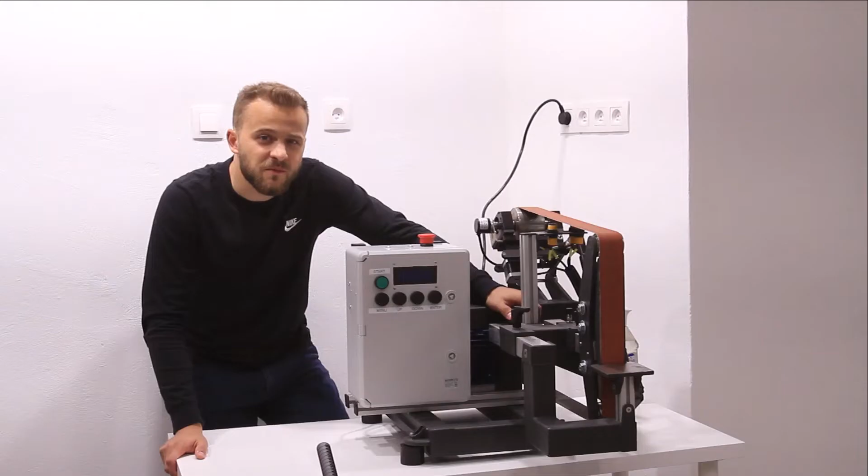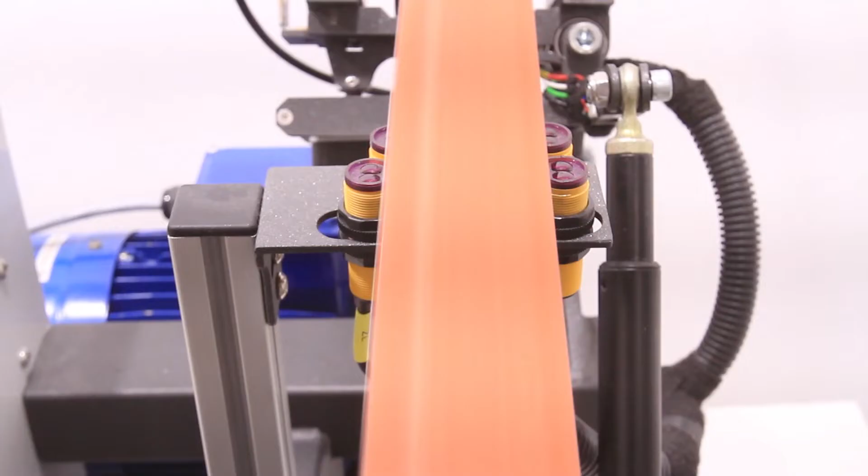In this video I'm going to show you how I constructed this belt grinder. Let's start with a 3D model created by me earlier. It allowed me to predict the alignment of components and their mutual interaction when in use.

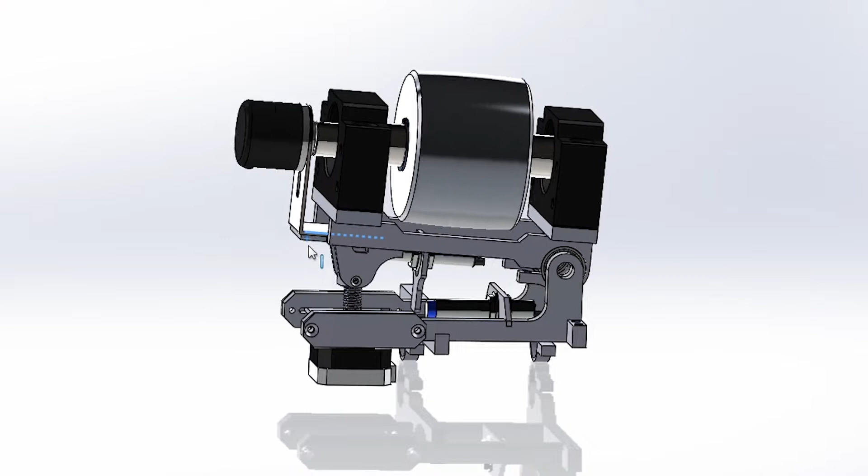What distinguishes my machine is the application of Arduino microcontroller to the following things: the interaction of the operator with the grinder, setting the working parameters and reading the actual parameters, ensuring that the actual speed is maintained, tilting the guide wheel to make sure that the belt is in the right position, and ensuring the proper tension of the belt. Let's now see how the whole thing was constructed.

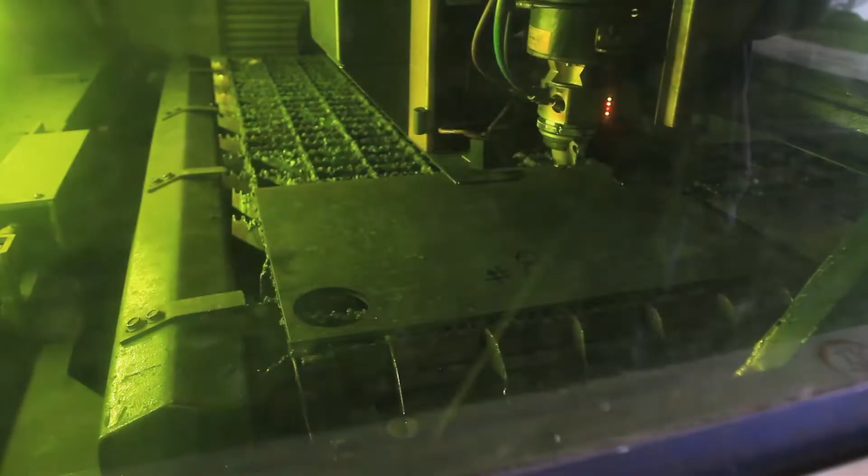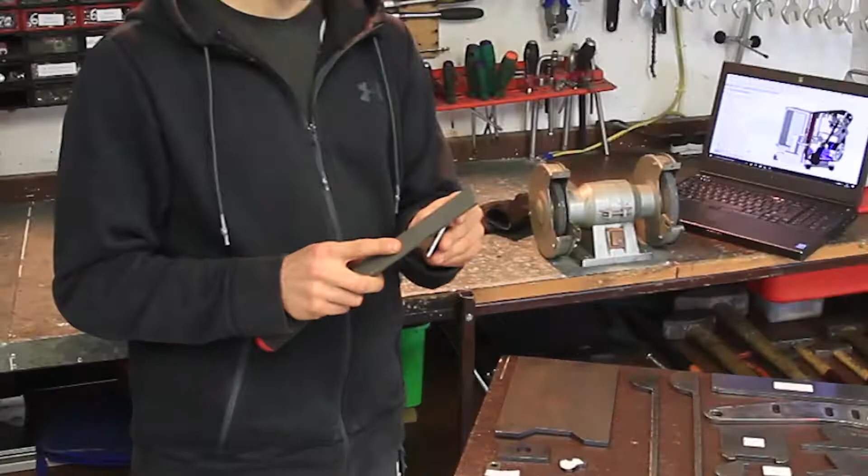Welcome in the garage. Let's start the assembly process. All of the parts I've created in 3D modeling software, I've ordered laser cut. I have cleaned them with a wire brush on a drill press, and then I've touched all of the edges with a file to make them smooth.

Now I have to take care of the third dimension, because as you can imagine, laser cuts only in 2 dimensions, and the third dimension is the thickness of the steel. So if I want to make some holes in this third dimension, I have to do them myself now.

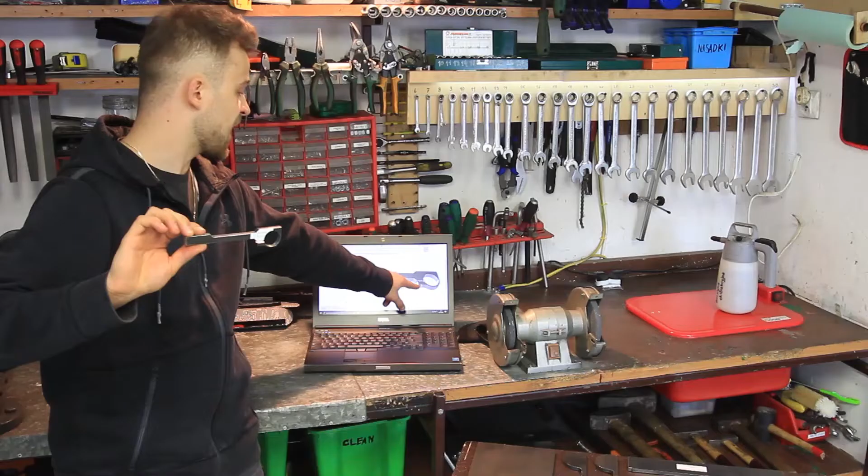Let me set an example. This is the bearing holder, and it should have a screw hole which is tapped and countersunk right down there in its third dimension. So let's move to the drill press and drill that hole. The process of drilling a hole might seem simple, but a few vital steps have to be taken.

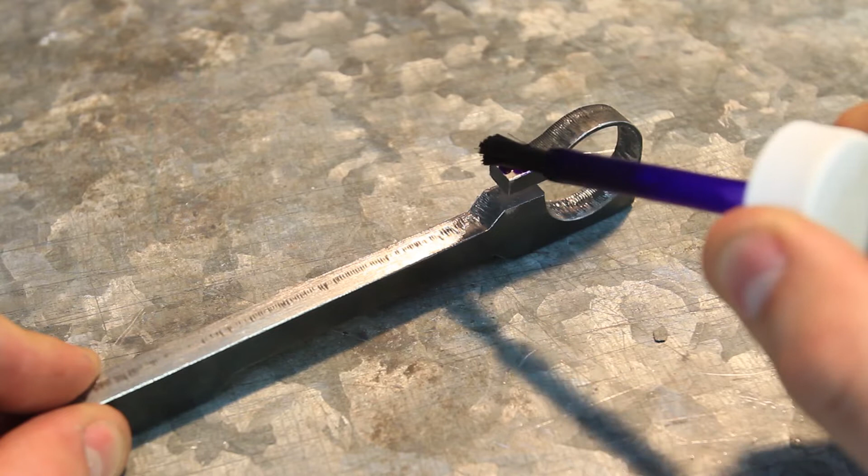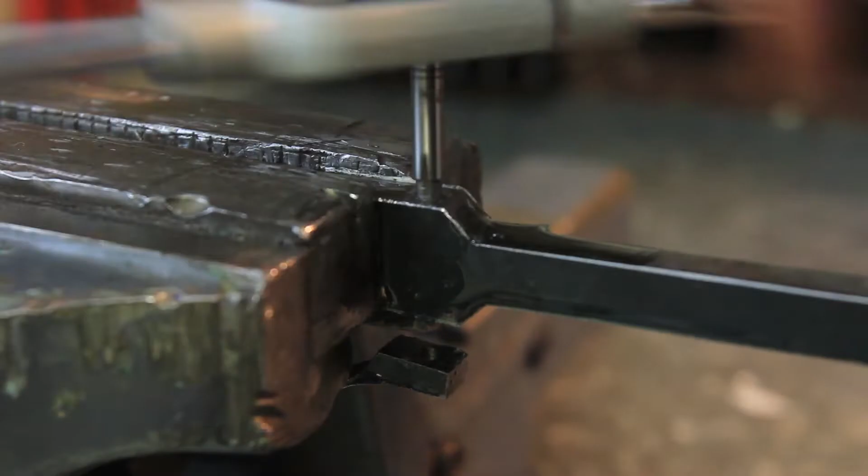First things first, the location of the hole has to be marked by scribing a layer of steel blue tracing fluid. Then the marked location has to be center punched. Drilling and making a countersink for a screw head are almost the last thing to do. After making the inner thread by a tap, it's time for a quality check with the appropriate screw.

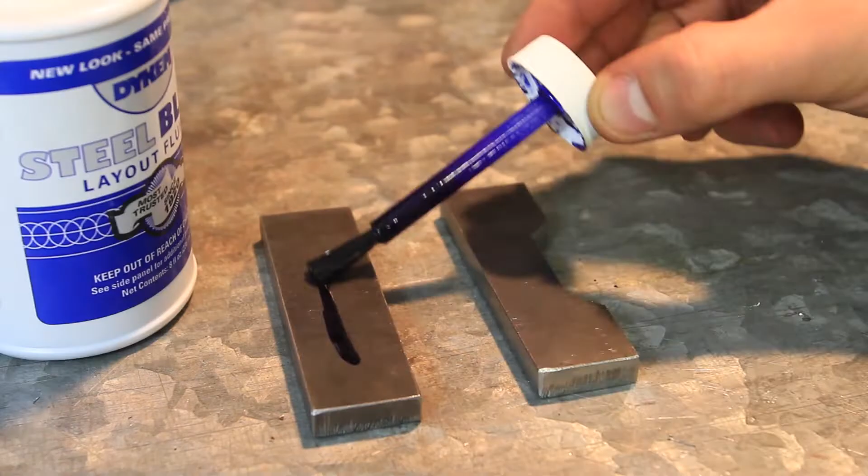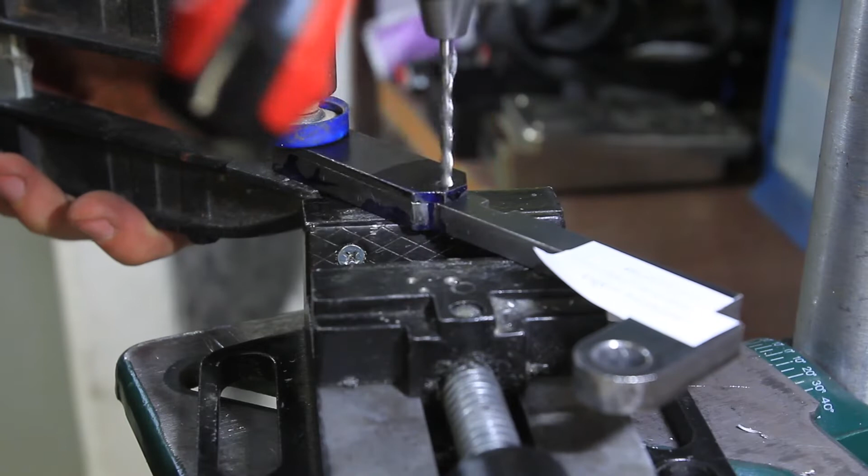Not everyone knows, but by using a combination of Ctrl+C, Ctrl+V on your keyboard, you can make multiple copies of your operation. The parts I have just made are components of an important subassembly. In common belt grinders available on the market, there is always a small adjustment knob. Turning that knob leads to tilting of one of the wheels. That wheel, which is out of the alignment, leads the belt to its side, compensating for belt or machine imperfections.

In my grinder, the operator will not have to adjust the belt position. Instead of forcing him to do this work, the grinder will adjust itself automatically by rotating the stepper motor, which is part of the tilting tensioning mechanism which you see me making right now.

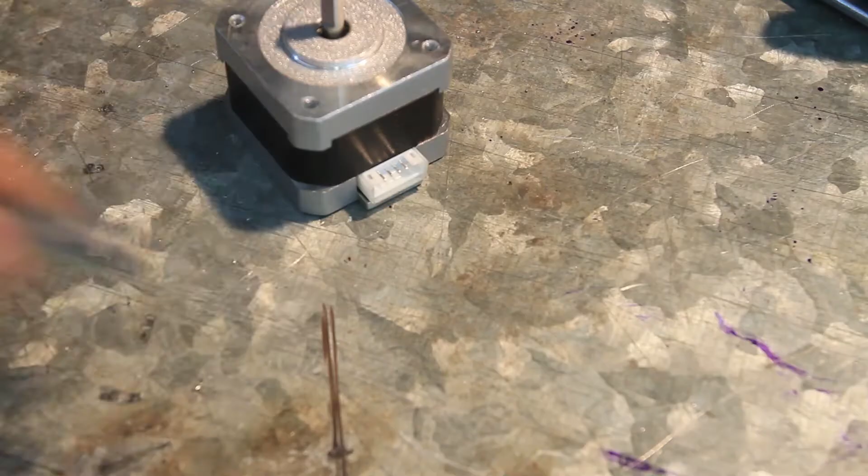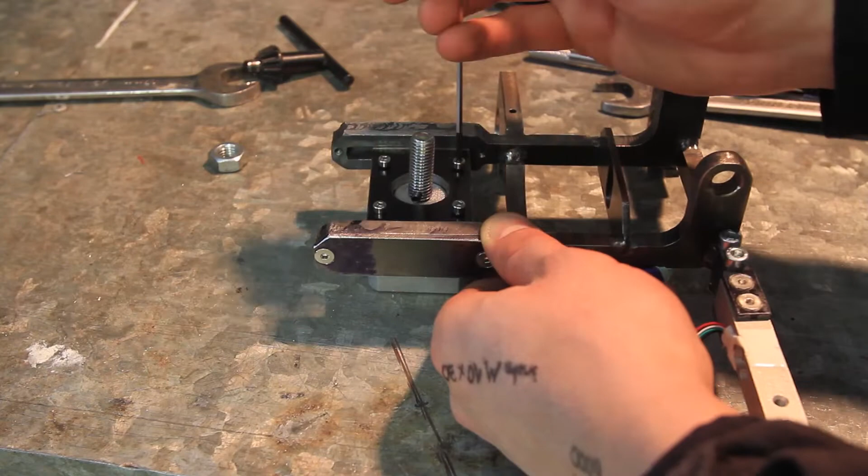After making this, I mounted the hollow M10 bolt on a stepper motor shaft and secured the motor to the sliding bracket with 4 small screws. I also modified an M10 nut by drilling it crosswise. By 2 screws with outer diameter smaller than the holes in the nut, I created a sort of a hinge, which leaves the nut with 1 degree of freedom, allowing it only to rotate around the screws.

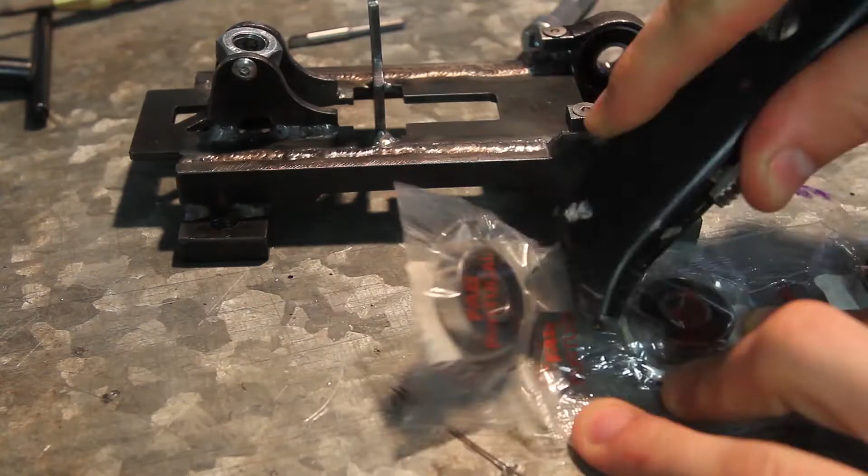Then, the bearings were inserted and set in place by the clamps tightened on them. I am very pleased because I have finished making this assembly. Of course, I have to give it a paint job later on, but mechanically it's ready. This is responsible for compensating any imperfections in the whole grinder build. It will do that by tilting the guide pulley left or right to move the belt to the center.

Now I have to move on to the next part of the build, which is making the frame. And I will do that frame using 50mm by 60mm box sections, which I have right down there.

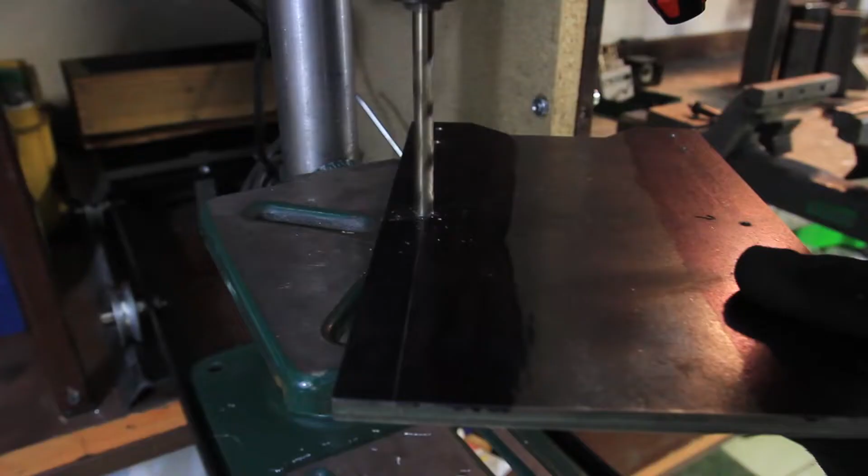Okay, so I've prepared all the material, I have cut all the necessary parts to make a frame, and I have painted the faces of the steel with the steel blue to mark the places where to drill out the holes. When these holes are finished, I will move on to the welding process and weld the frame.

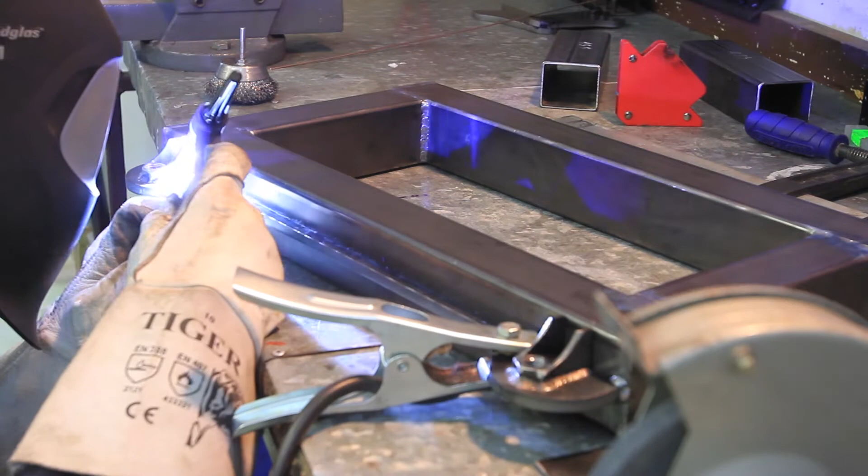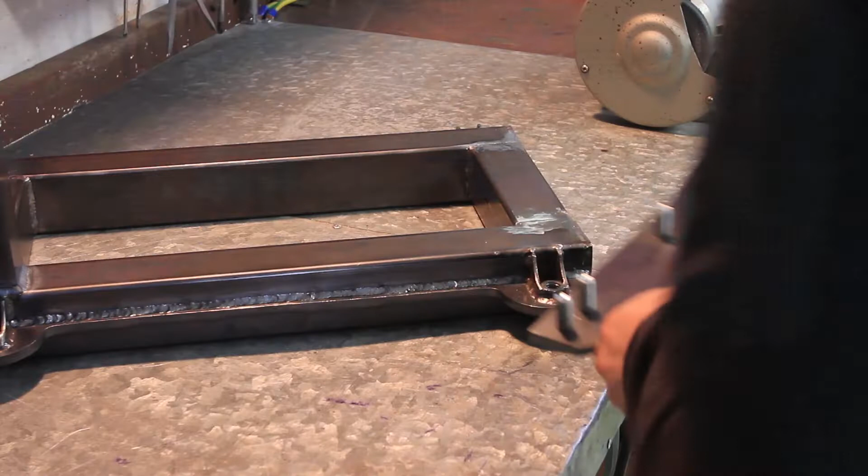After having the last part of the frame welded together, I sent all of the ready components to have them powder coated. Now you can see me manufacturing the shafts for 2 of the belt wheels. I used a piece of chrome coated rod with outer diameter of 20 mm, which is available on the market. Using a handsaw I cut it to length and then I drilled it through and tapped the hole.

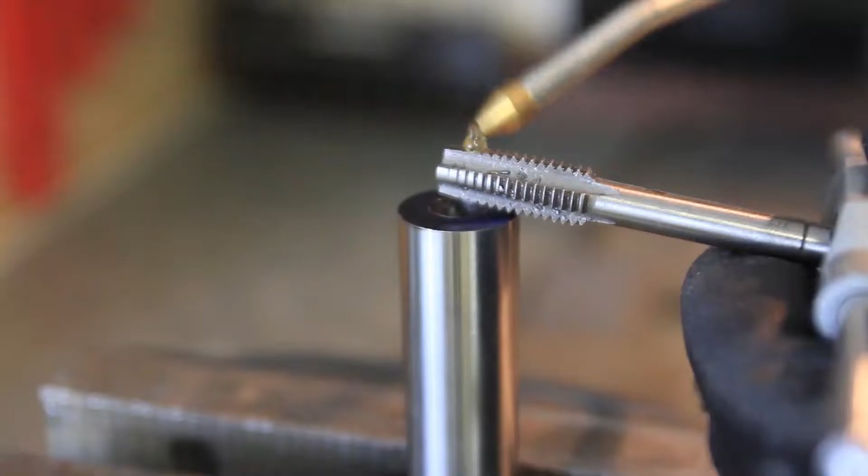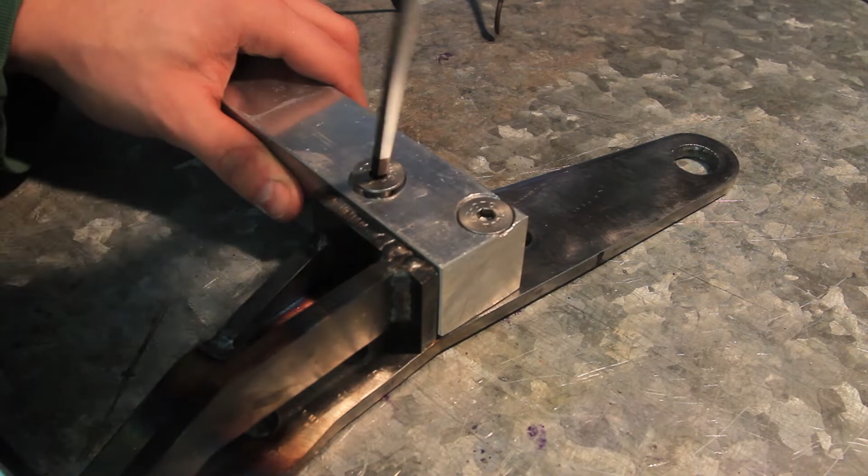Off camera I welded the bracket, then I connected it to the aluminum bar with 2 M10 screws. Freshly threaded rods fit into holes in the bracket where they're permanently secured with a circular weld. I have finished making this pulley holder and I really wish it would be straight, but it will show when everything is finished.

The rest of the laser cut parts still need my attention, but I have received a painted frame. I have it powder coated and I'm really happy with the result. Now I'm going to move on to the next step, which is assembly of the frame and the ready parts and some bought parts, like for example the electric motor.

Then I'm going to use the ready parts as the reference point when welding these parts right there. This will make things a little bit easier because the metal tends to shrink when it's welded and you really can't predict the exact dimensions after welding. So when I use the frame as a reference point, I really wish that everything will fit together nicely.

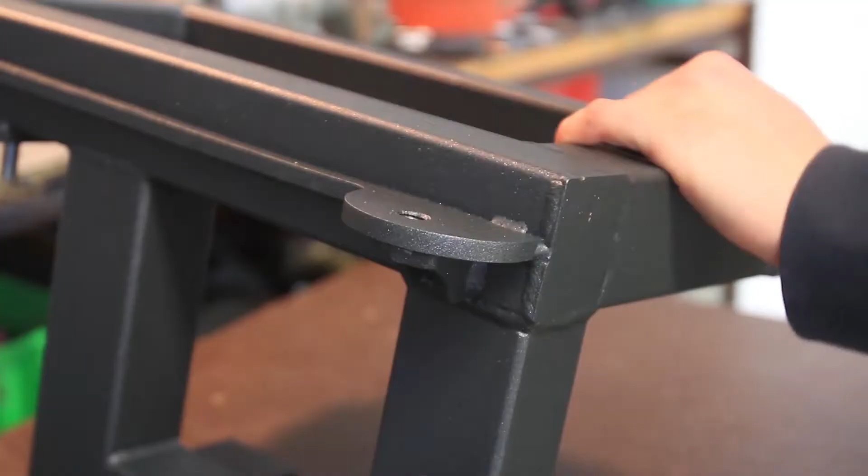By the time you see me assembling the grinder, I will try to anticipate some of the questions that might appear in the comments section.

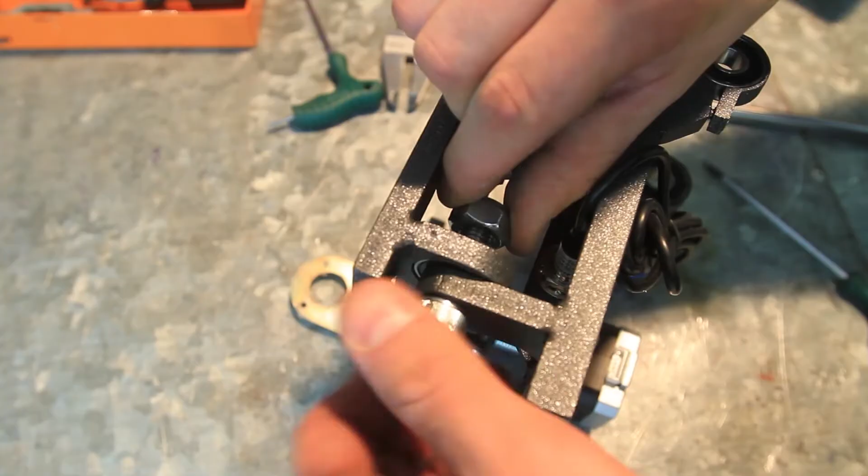Unfortunately, I don't have a lathe, but I have my 3D CAD model, so I could prepare all the technical drawings and order all the parts which need to be turned out of steel. I have a traction wheel which will go somewhere there. I have also the 2 wheels which I have to press the bearings into and then mount it right over there.

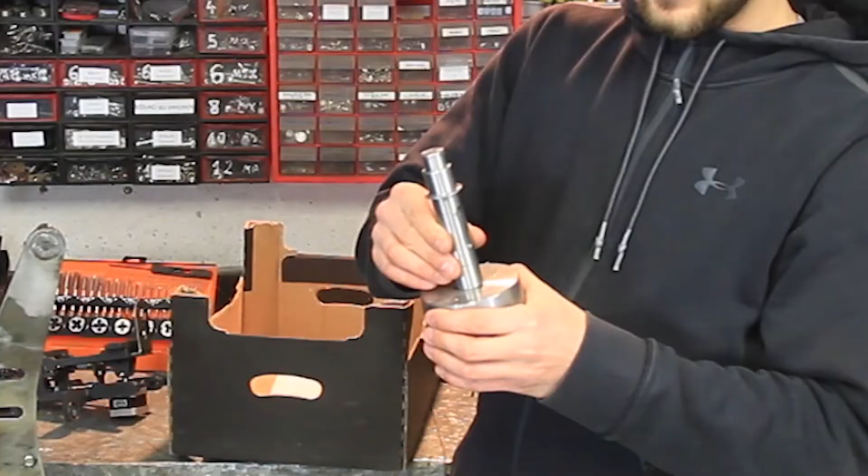Moreover, I have this big wheel which will go on the motor shaft, and about the shafts, I have also a shaft which will be pressed inside this wheel and that whole assembly will sit over there.

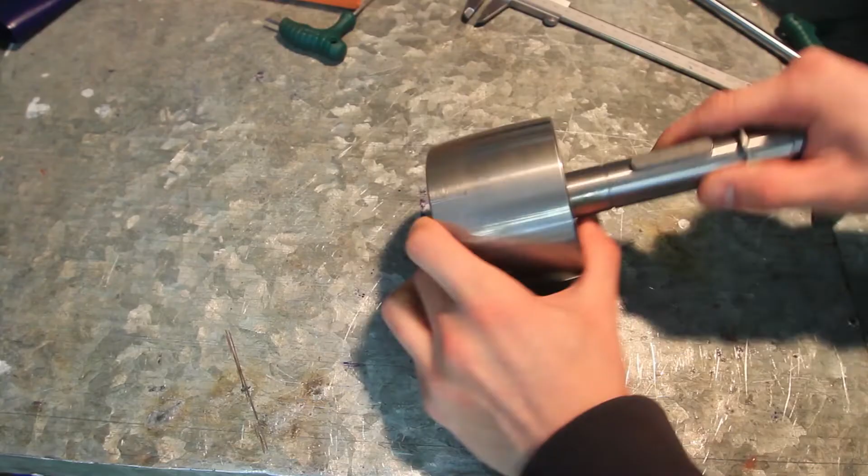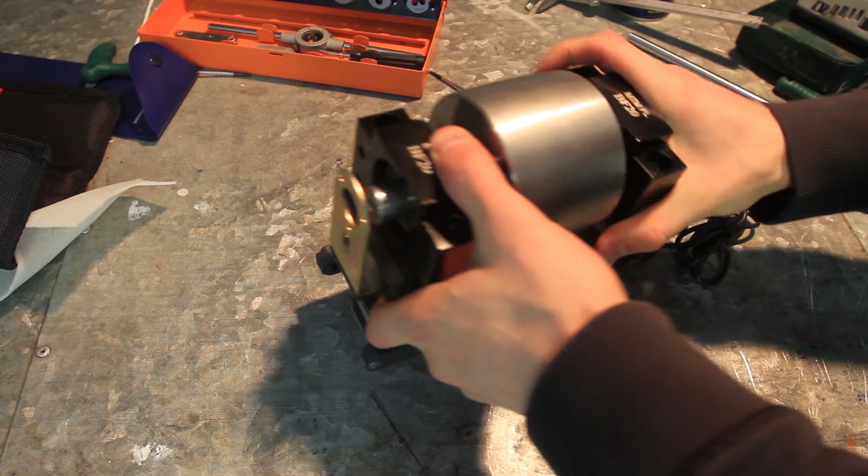To assemble the machine in the above mentioned way, I had to fit the traction wheel onto its shaft and use a snap ring to set it in place. Then I inserted the shaft into BF bearing blocks and secured them to the base.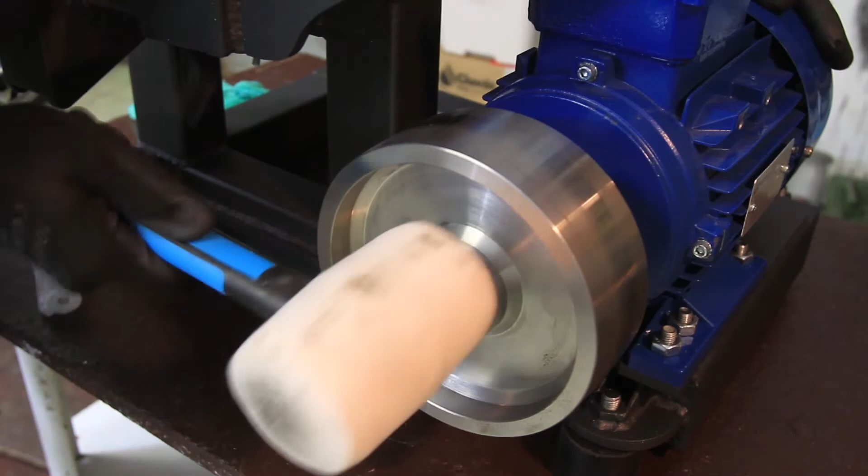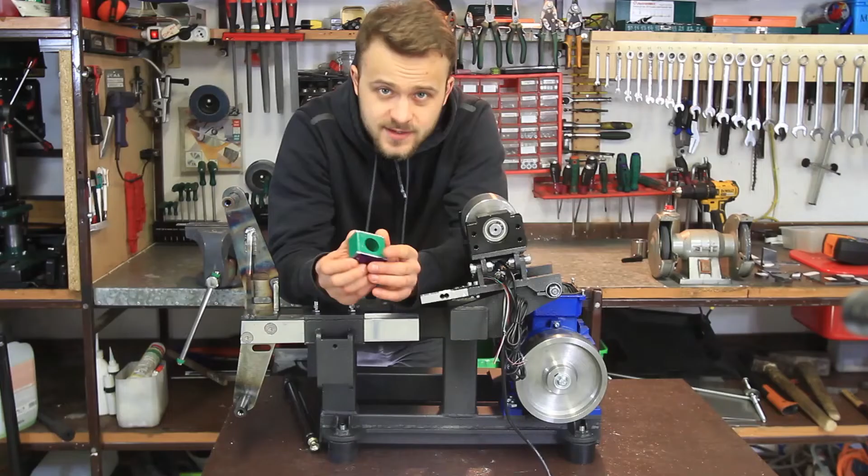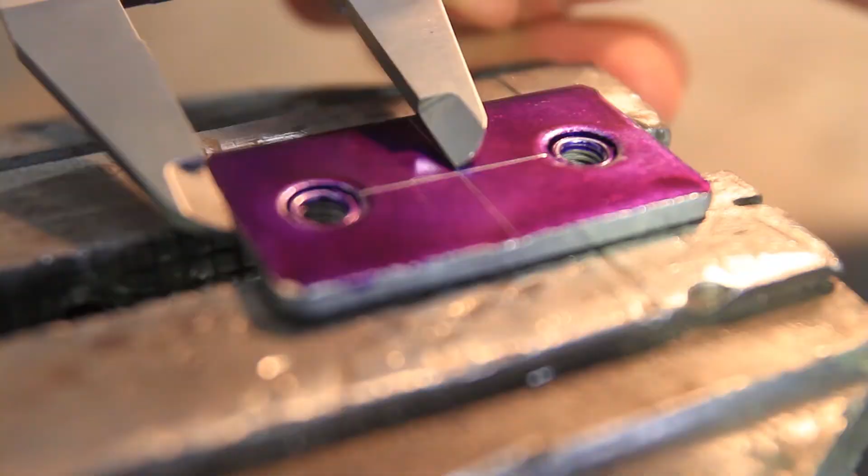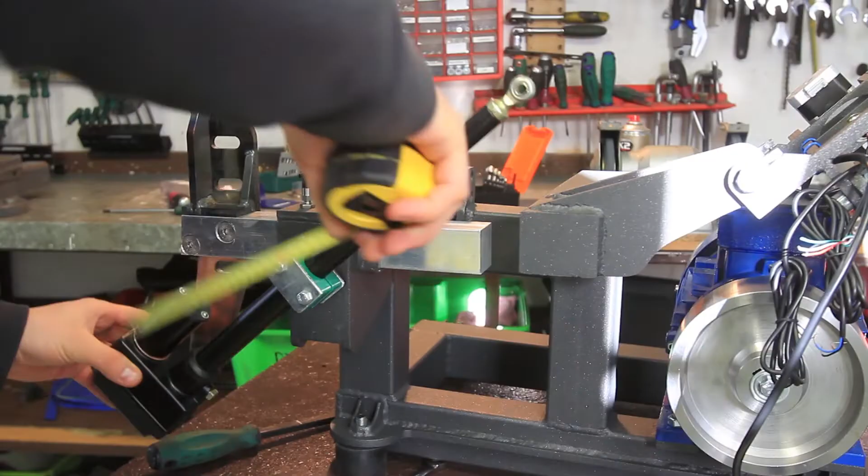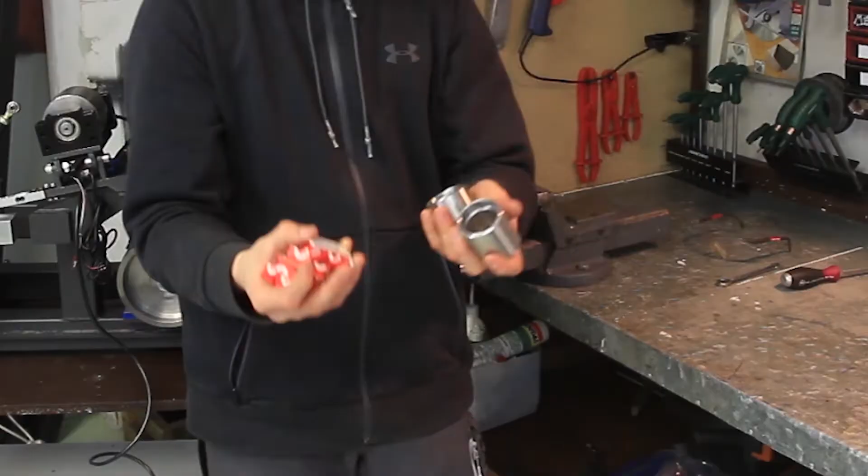Because the step with mounting this actuator is quite finished, I will move on to the next, which is to try to press bearings inside these two steel pulleys using my vise, because I don't have a press.

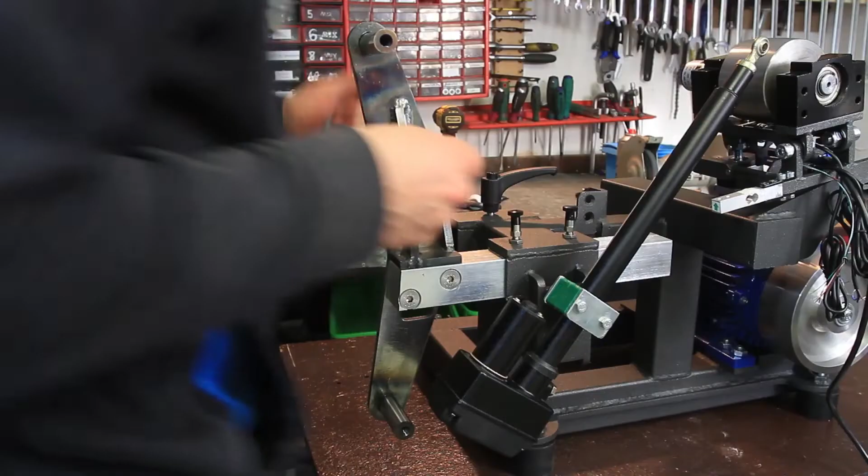After pressing bearings inside the wheels, I mounted them in place according to the 3D model. On the shaft first goes the washer to keep the bearing from the steel plate. Then goes the wheel with bearings and another washer and a screw to prevent the wheel from sliding off the shaft. Off the camera I have welded this element, and I wanted to attach it to this pulley holder.

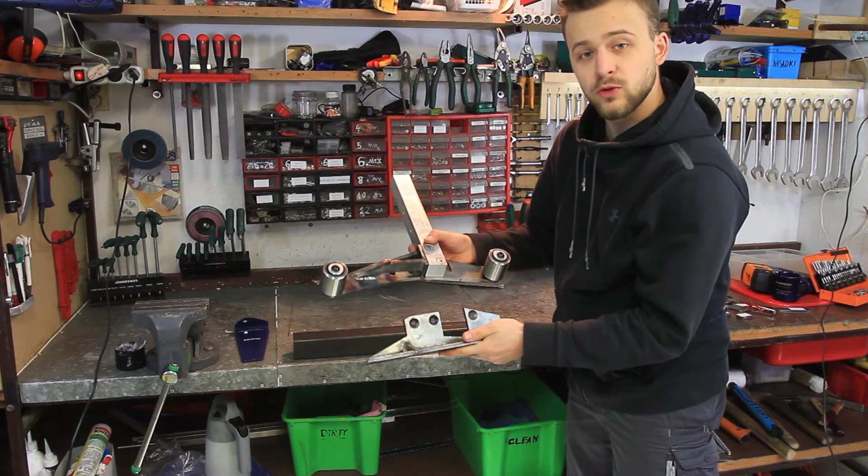And these pulleys should be flat with that surface. So I'm using this box section to align it, and it should go like so. Yeah. And now I'm going to use some M10 by 30mm screws to hold it together, like so.

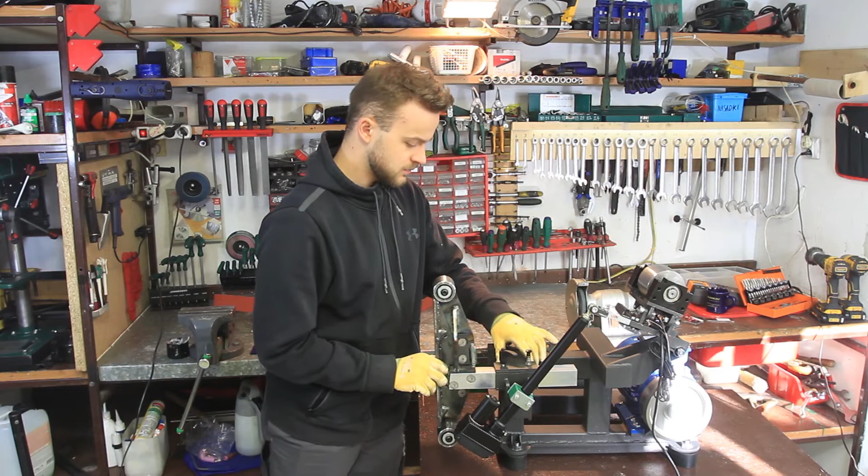Okay, it's almost ready. And finally, it's the moment to put the belt on and wire it, at least temporarily, to check if everything is kind of straight and if everything will work.

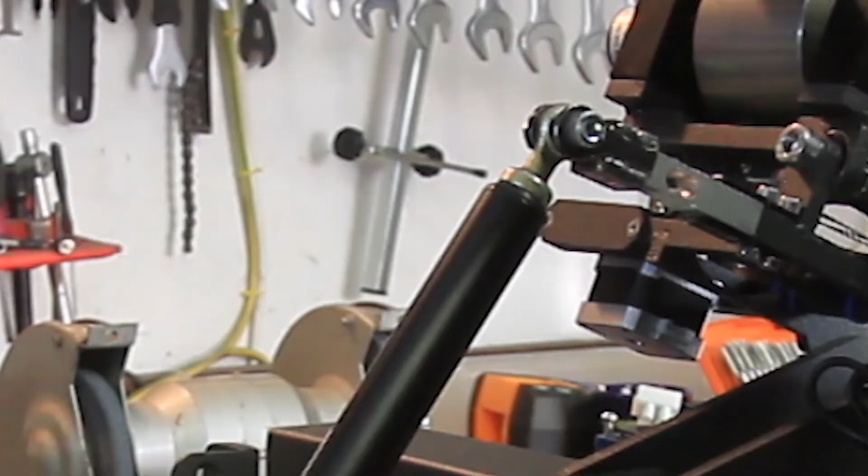As you can see, I have disassembled this machine a little bit, because I have to have all these small welded parts powder coated to match the look of the frame. What I'm going to do now is to wire this tilting mechanism to check if everything works properly.

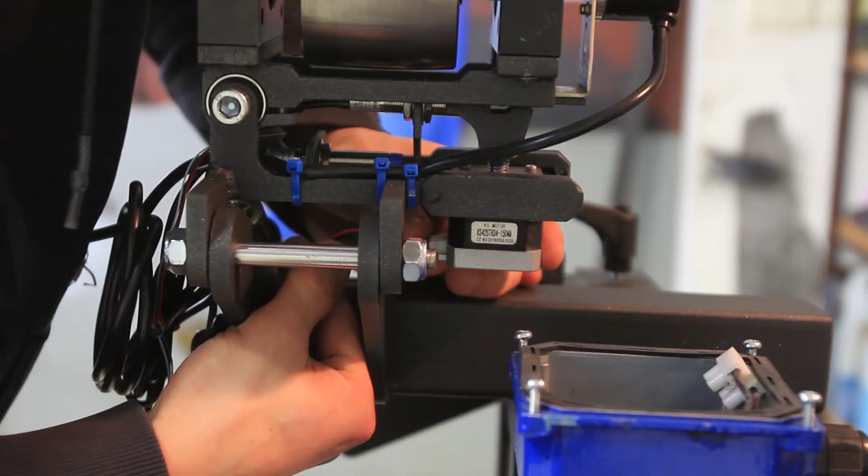It was not without difficulties, because the electronic part is my least favorite part, but it finally works. But there is still a small issue. If I put my hand on top of it, when it moves up, I can stop it with the force of my hand. And that is not acceptable at all.

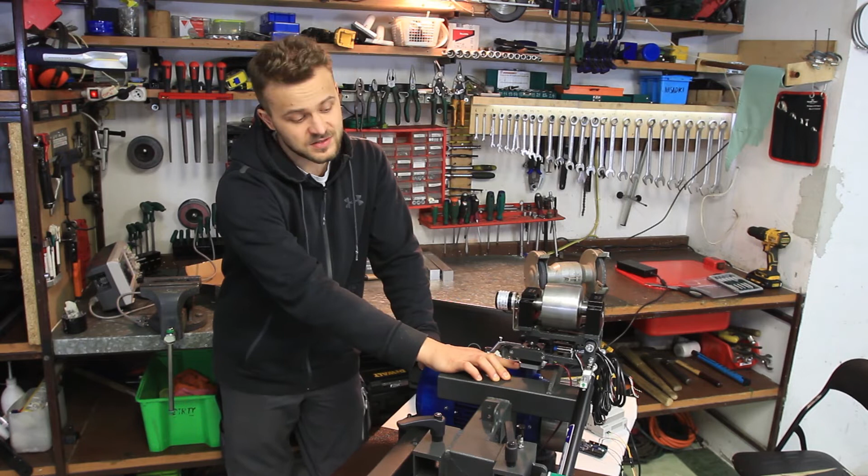What I'm going to do to fix this problem is to change this motor for a bigger one. Because it's NEMA 17 standard, I can fit a little bit bigger motor right down there, and it should fit the old bracket. So I won't have to re-weld and remake everything once again.

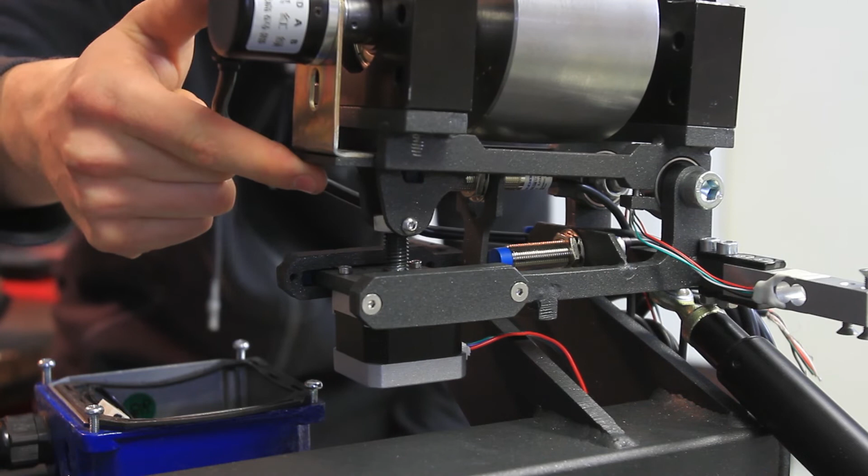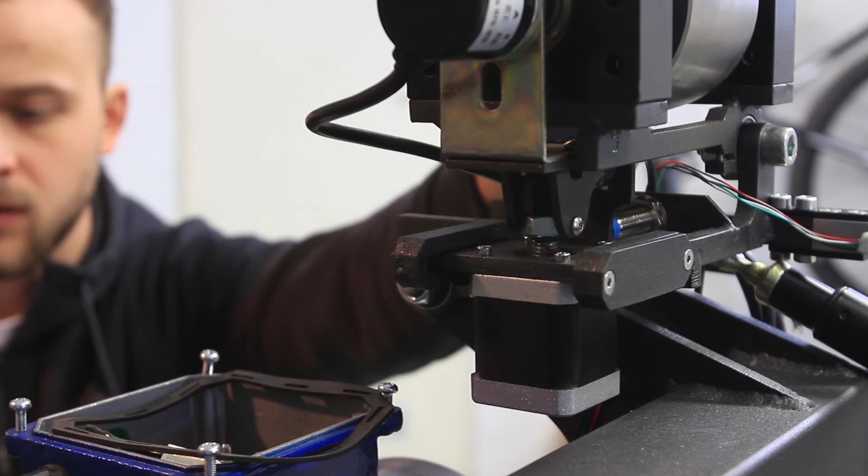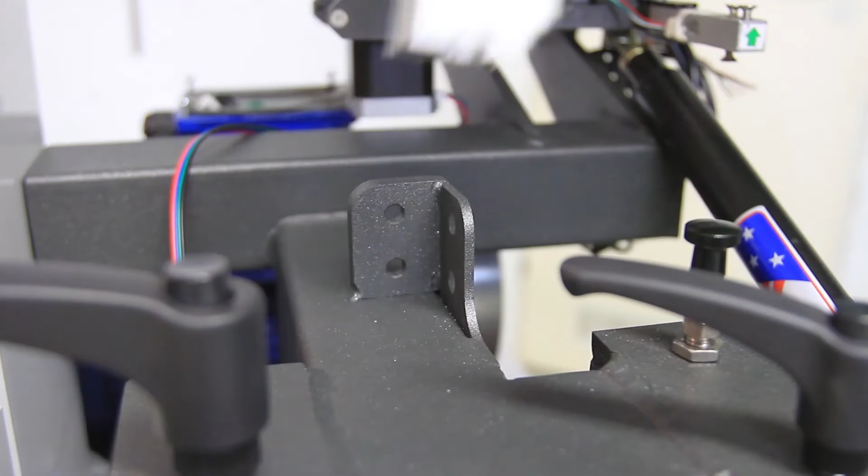After ensuring that the guide wheel tilting mechanism works, I moved to mounting the plastic box for the electronics. I also installed inductive proximity sensors. I cut some aluminum extrusion according to the 3D model. Then, using rivet nuts, I secured them to the frame, and in other places I used dedicated mounting points which were prepared beforehand. The rough endings of aluminum extrusion were covered with plastic end caps, which is not only safe but also looks neat.

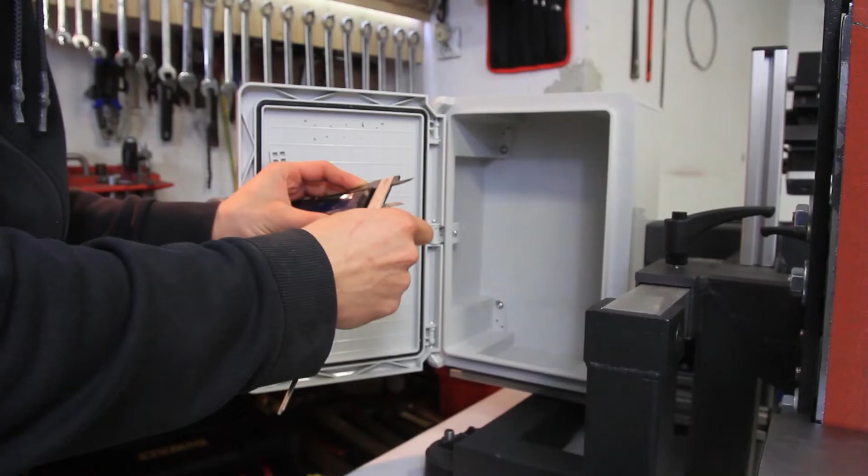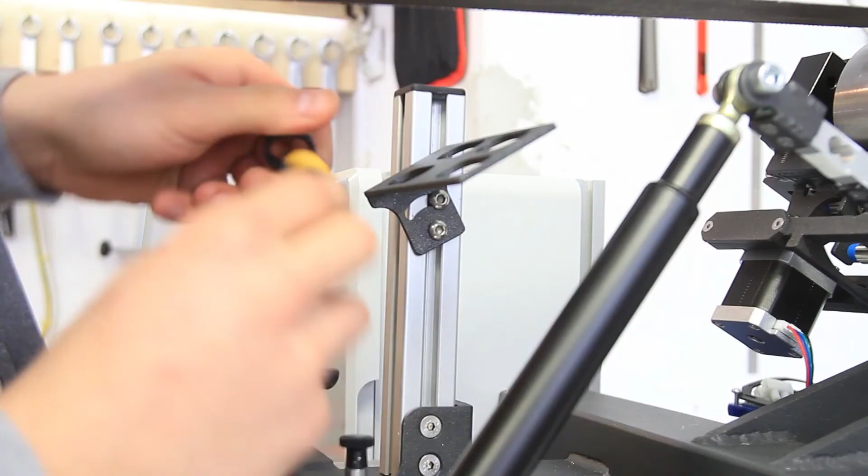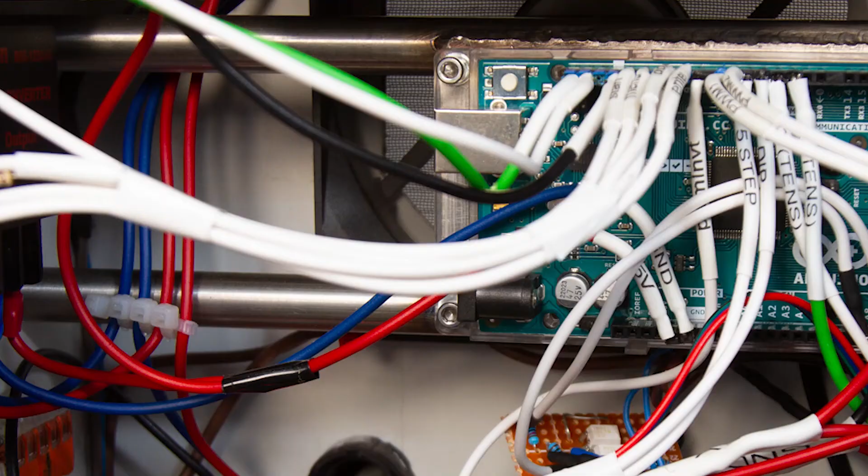After making all the necessary electronics connections and hours of programming in Arduino IDE, the grinder was completed. No DIY grinder construction video is finished without the pencil sharpening test, which you can see me now doing.